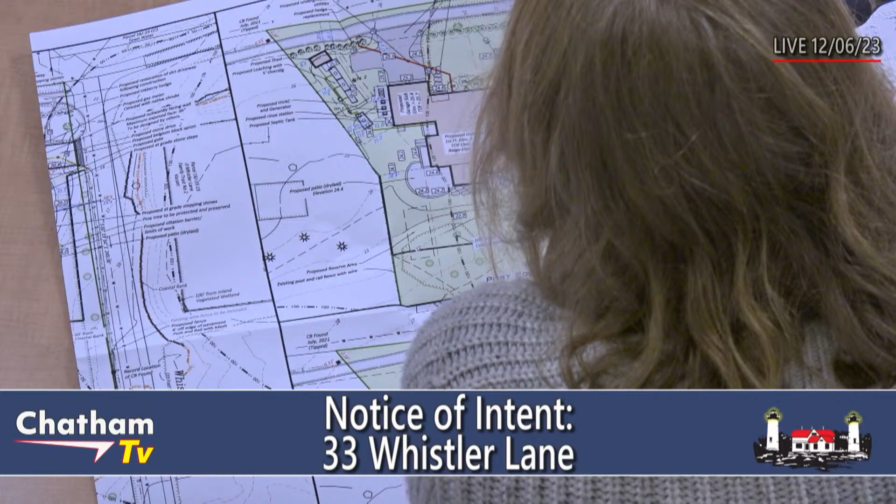Though grandkids will probably have fun rolling down it. Will it be planted with grass? Currently, that's the plan, to plant a grass mix on it. They are working on a landscaping plan and would like to come back in later to work with the agent on the final landscaping plan.

Do you think that would happen before the end of January? I can certainly ask. It'd be great to have that in at that point, so we could get Paul's input, and then approve everything at one time. Oh sure, okay.

Okay, on the mitigation area, way down at the end of the property, I can't quite follow where fences will be after you're done. Will fences be on the inside of the mitigation area, on the outside, or just one or the other? No, the fence would be set, and then the mitigation would be outside of the fence, contiguous with the Wilkinson ecological restoration that occurred on the adjacent property.

So we're not separating mitigation from other mitigation areas or other native areas. So will there be a fence around the whole property in addition to your proposed dog fence? No, that would be the fence.

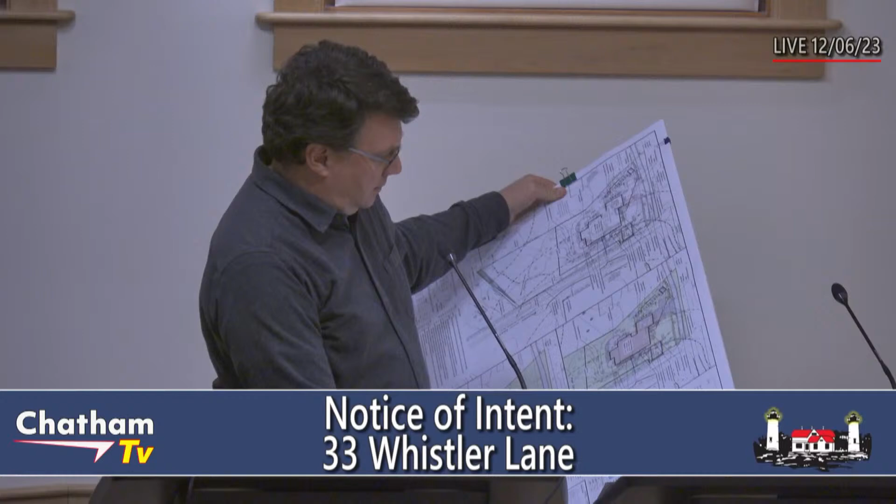Okay, so the green line, what does that represent? The property line? Property line, okay. Even though it says in the green area, existing post and rail fence with wire. Yes, because along the westerly property line there is an existing fence.

That would be cut back, and then a new fence would come across. There is a wire fence that exists at the edge of the lawn now, that would be removed, and a similar post and rail fence would be installed heading around. So will there be fencing all where the green line is? No, just the property line. It'll move forward, north from the green line, and to the south we'll have mitigation. But otherwise, it's the property. But no fencing otherwise? Right, other than that fence.

Why do you need that fence if it's not connected to any other fence? It would be, that's why I'm confused. Okay, so we have an existing fence, is that the property's fence or the contiguous one, who put that fence in? I believe the Goheens put that fence in. I was just wondering where that went.

So we have existing fence along the westerly line, it goes down to the property corner. We would pull it back one section, and then attach a fence that runs out to Whistler and then back all the way up. And the dog fence would connect to it. That's the dog fence. It is the dog fence.

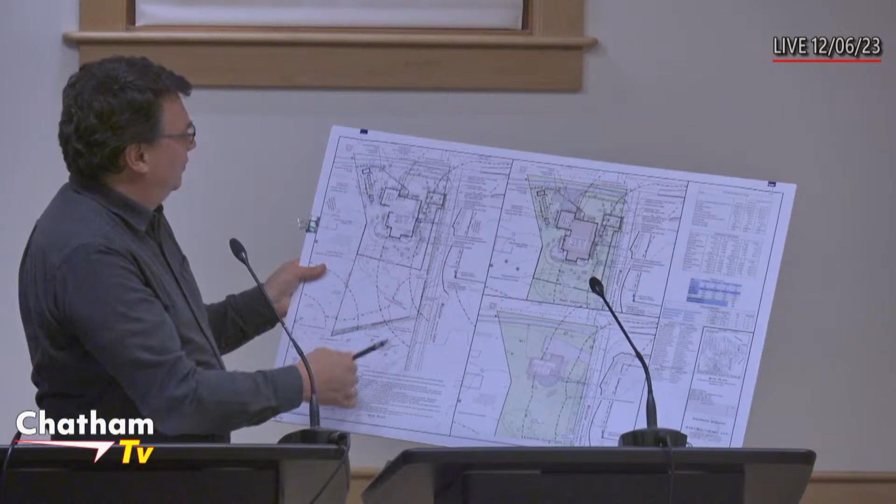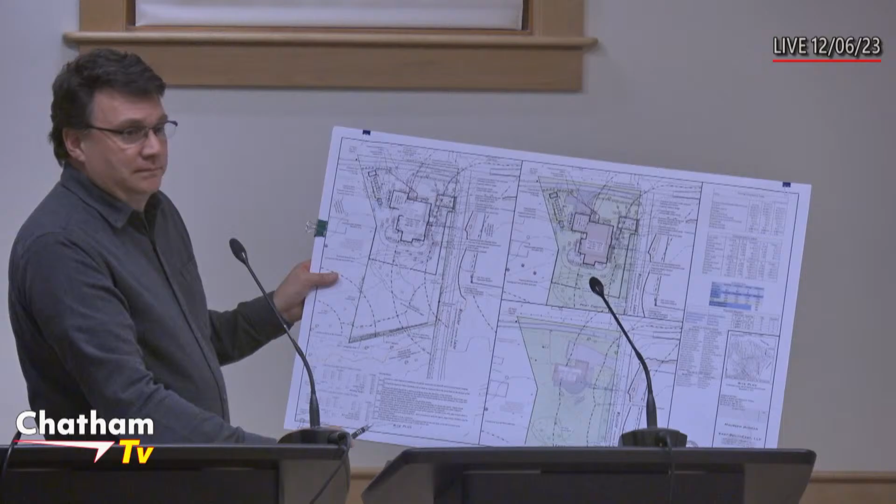And you say the foundation plants will be native, drawing from the list included in your plan? Yes, we added a few in there just to get things started. We put inkberry in for a hedgerow to the north, that may change out to a winterberry. There's some pasture roses that I put up against the house. It's still up in the air at this point, so I've given them the native plant list and they're looking through it. Oh, so that's not firm yet? No, but they'll get us something before we have to rule. But I have expressed that it's going to be predominantly, if not entirely, native plant species.

Yeah, I want to ask you a general question. I think I've asked you this before, but I want to ask it again, and that is, typically with your projects, very often you don't work with a landscape plant person. Who does your planting, and what is the plan of care for the mitigation plants?

We did pull together a set of notes after the last time you mentioned this. I don't have them on this plan because it's not really a landscape plan, but we generally work with the property owner and provide a list of what's acceptable. Sometimes we say this will work here and that will work there, and we just stick to the native list.

We often put in orders of condition if we don't know who the critical key contractors are ahead of time. That selection has to be approved either by the agent, or the agent can refer it to us. Sometimes we don't know ahead of time, so we put that in if we don't know.

On the mitigation to the south on this one, I cheated and copied the list from the land management plan that occurred to the south, because that's got to be compatible. I picked and chose so that it was the lower plant, so that it meets the view easement, so they're not in violation.

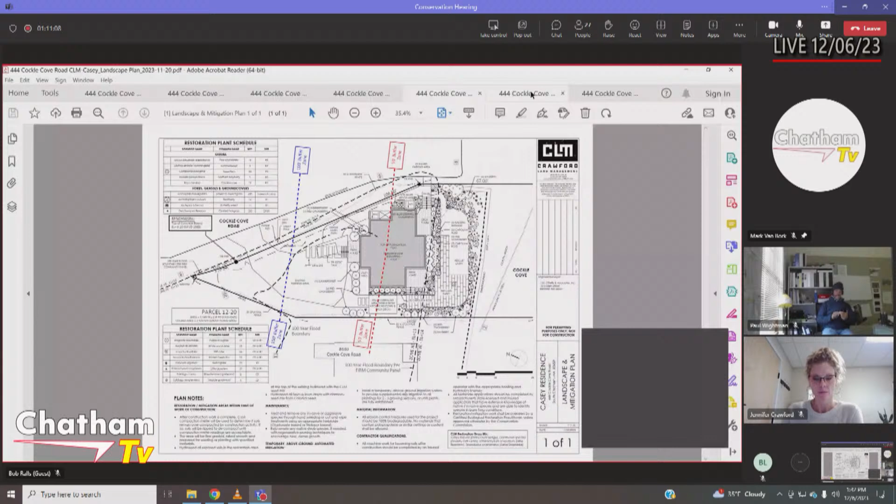So we're proposing to demolish the house and deck and reconstruct a new single-family home, 3 bedrooms, on a flood-compliant foundation. We've pulled all structure out of the velocity zone, showing about 460 square feet reduction in the 50-foot area, and an overall site reduction of hardscape and building of about 200 square feet.

The site is improved with a shell driveway, which will remain as currently constituted with some introduction of pavers. There's a small bit of lawn at the end of the driveway along Cockle Cove Road, intended to remain and be converted. We're proposing an outdoor play area - if you've been to the site, there's a play structure in front of the house, so we'd create a bark mulched area around it, placed on the west side of the house for visibility from the house and rear deck. There's also a proposed dry-laid patio for outdoor grilling and vista.

The remaining area is going to be planted, and at this point I'd be happy to turn the meeting over to Jen, who will talk about her restoration plans, and then answer any questions the commission has.

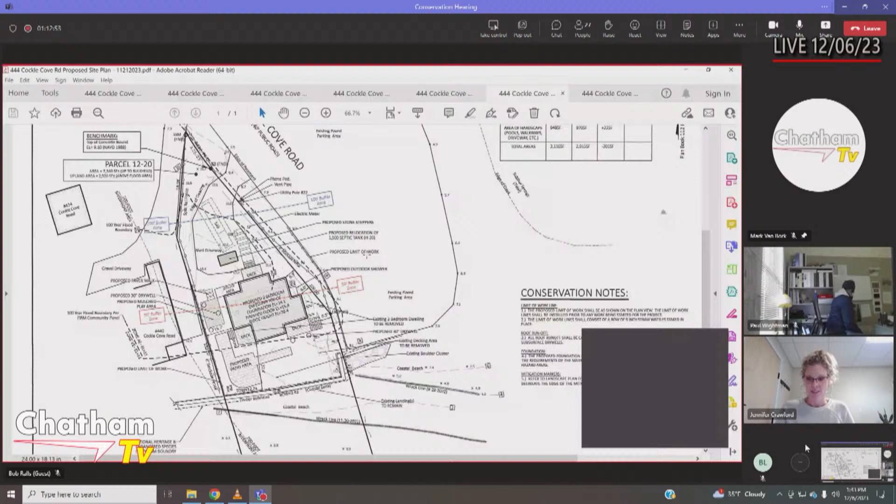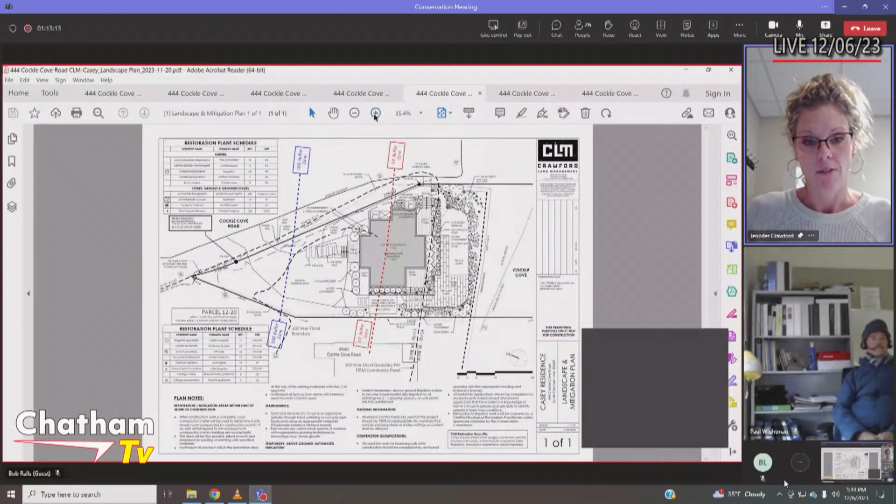The project is pretty simple, John has already hit all the highlights. With our restoration plan, since we have a net reduction of coverage throughout the buffer zone area, we've proposed plantings around the house and along the top of the bulkhead. If you visited the site, you know that area is currently just open sand or has the existing house and deck right up to the end of the bulkhead, so anything we're doing with this plan is an improvement over the existing condition. We've chosen as hardy of species as we thought we could, since this is an extremely exposed location getting buffeted by wind, salt spray, and other conditions these plants will be contending with. Our species list isn't extensive in diversity, but we have limited availability for working in these site conditions. We've included a fescue lawn panel to accompany the dry-laid patio area, so there's some outdoor space that can be utilized on the property, as the house and deck components have shifted so far back from where they currently exist. That pretty much covers it.

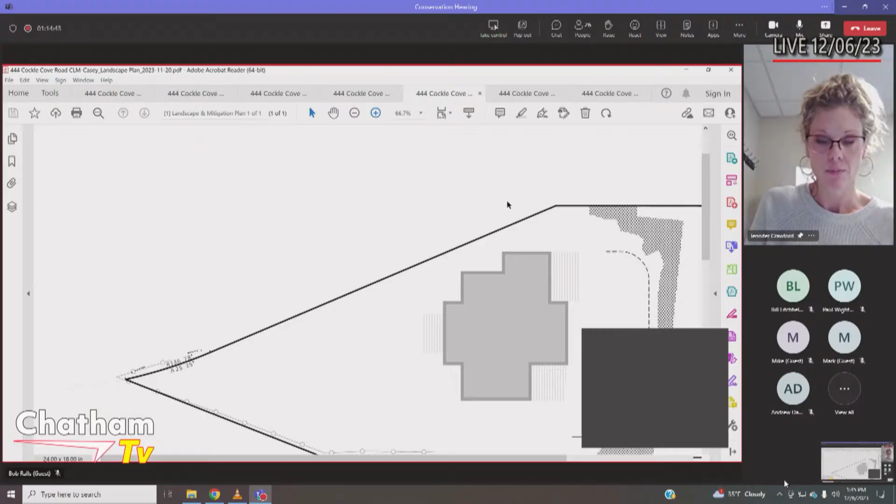John, I want to go back to something you said. You mentioned that the remaining lawn along Cockle Cove Road will be retained and converted. Right now it's regular grass, but Crawford Land Management identifies that area as becoming fescue lawn. So the existing lawn along the roadway will be changed to fescue? According to Jen's plan, yes. My point was that the driveway is basically staying as you see it today. That's why I wondered if I misheard you say converted, since I thought it was just staying.

Okay, thank you. Can you explain the patio proposed for the front of the house, facing the seaward side, which is fairly large and an unusual configuration, and is in a VE zone?

That area currently is open sand. That side of the house has the kitchen and dining room, versus the parking lot side where the primary bedroom is. Since the active part of the house is on the south side, and we can't extend a deck or have structure within the VE zone, it made sense to utilize that area.

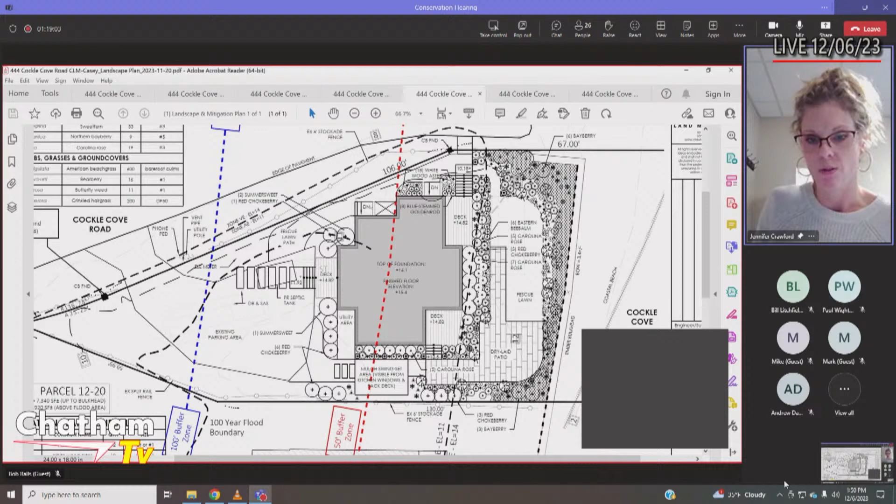Why does it have that long extension, the long piece? We wanted to accommodate the current patio furniture the property owners use on the very large deck on top of the bulkhead, since that's how they've historically used those outdoor spaces. I included that long strip so they could place seating along it to sit and enjoy the view, since it's also very windy on this site, versus other furniture better suited for gathering on that corner.

Would it be helpful to show some of that on a plan so you could see how large or small the spaces are? That would be helpful, because I'm struggling with scale here—since dimensions aren't indicated, in my mind it keeps growing and shrinking. Yes, adding anything that can provide scale would help.

But this area is separated from the house by the restoration plantings in between, right? So it's just accessed from a set of stairs off the deck? Yes, that's correct. And that planting bed is only about 3 to 4 feet wide between the deck and the dry-laid patio, so it's small—not like a large 10-foot wide planting area.

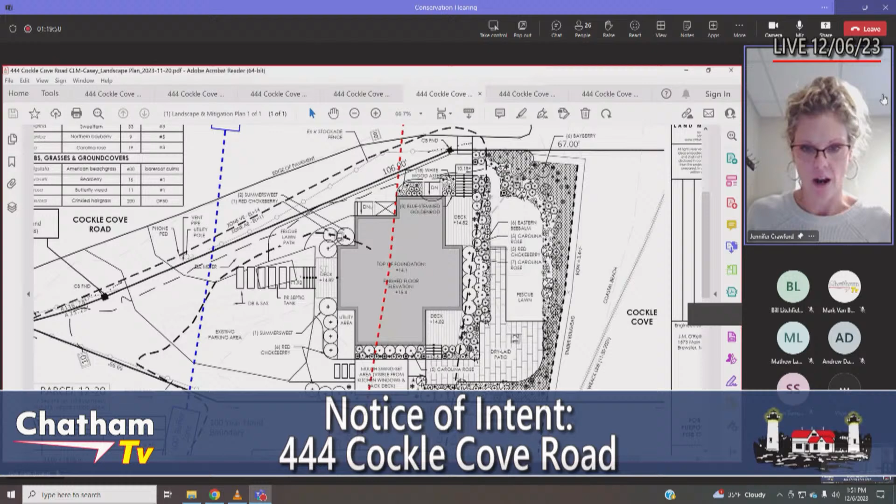These are very small spaces in actuality that we're working with, but we're happy to add dimensions and show some furniture to help bring it into scale. We can also show it alongside the current large deck that spans all the way to the top of the timber bulkhead. It might be helpful to see that size comparison.

So Jen, is your idea that putting in this patio, they'd have more of a tendency to protect the grass that's further to the right of it? The fescue lawn would be protected because they're less likely to put lawn furniture on it, because now they have a patio to put the lawn furniture on. So is that part of your reasoning, that this protects some of the grass so they're not moving furniture onto it? Yeah, absolutely.

And also you have to remember that it being in the velocity zone, we can't propose a deck or even an elevated 6-inch deck that sits above. We're really constrained, so we're trying to maneuver through these regulatory areas as gently as feasible, so to speak.

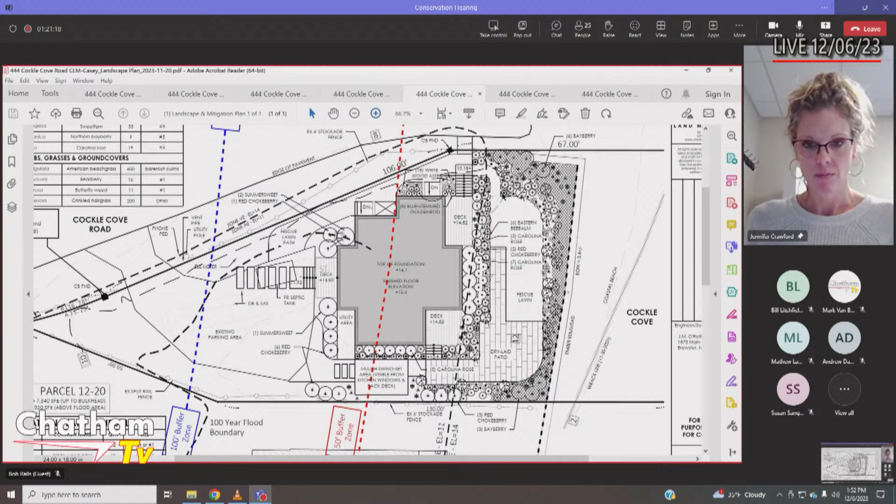Thank you, if I could just chime in through the chair. The existing deck that sits seaward of the house is 22 feet deep from house to bulkhead, and about 25 feet on average east to west. So the deck is massive compared to what we're currently proposing. The western deck that has the set of stairs onto the patio is 9 by 10, and the eastern deck that serves as access from the yard up the stairs is 6 by 14.

So the patio was asked for by the applicant simply to be able to enjoy the outside. Because really, those decks—Jen's right—you could have enough room for a table and 4 or 5 chairs, but they also serve as access into and out of the house. So putting a grill plus a table, we just needed some additional space.

And Jen came up with a great idea of a dry-laid patio. Honestly, we could leave it as just the sand that's there now, but we felt that also wasn't a good option. We feel that being able to have a space where they can put their patio furniture, and kind of stay sheltered behind the neighbor's fence when it's windy, and provide a space they can actually use on the water side of their house, was fair and reasonable considering the moves we've made to move everything further back and out of velocity zones and reduce that NDZ zone.

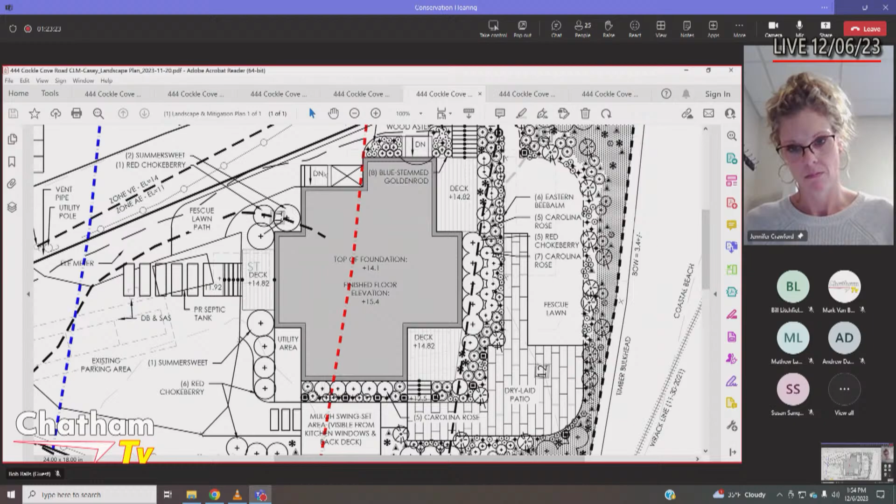I do have one question—I can't remember what it was, I wrote it down. Outside shower. It's not within the 50 feet, so it's definitely in the 50 to 100 zone.

Can that be called a rinsing station? Yeah, it's a rinse station. On the plan it says outdoor shower. I just read it. No, it's a rinse station. That's what I assumed you meant. I thought you would agree with us.

I could blame the drafts person, but that would be me. Well, then go ahead and blame them, yeah.

Okay, Karen? I'm a bit concerned about putting the swing set and mulch primarily within the 50 in the NDZ. I know the swing set has very little impact on the ground, but the mulch does have an impact. And I'm wondering why you placed it there and why mulch.

I can respond to that. This property owner has children that are special needs children, so having a swing set is something they very much enjoy. Being able to locate that in an area directly outside the kitchen window, as well as outside the dining room and connected to the outdoor living area, was extremely important to this property owner, so they can keep an eye on their kids and have that area function within the greater landscape.

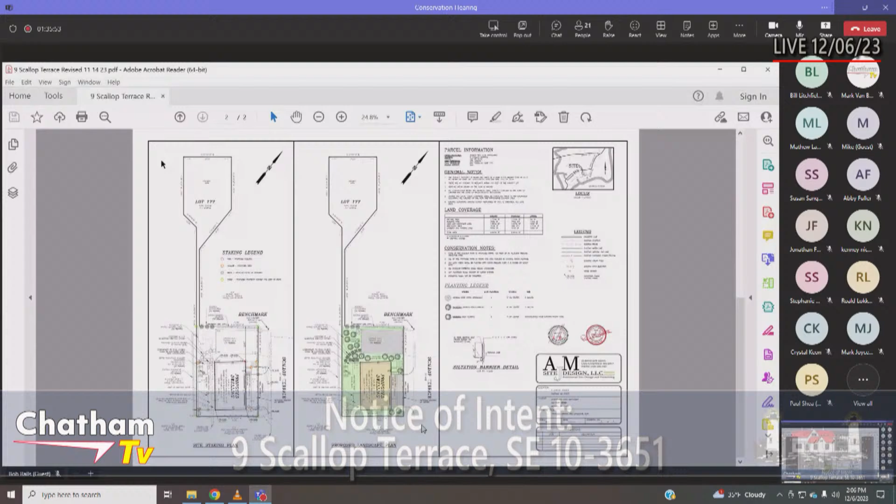As part of that, we're also relocating the 5 inkberries that were located in the front of the house, per your request. We will use those to do a little screening around the rinsing station, also per your request.

There was some discussion last time regarding the apron. We had originally proposed a concrete apron leading up into the drive-under garage, then discussed possibly a dry-laid cobble apron, but we're actually going to remove the apron altogether. We're going to run shell right from the garage to the edge of pavement in the front.

Also, in that thread, we went in front of the planning board last week for a zoning board referral for a second driveway in the Conservancy District. Generally speaking, they don't allow that second driveway, but under these circumstances, where the parking down here is generally not good, and given that we're removing the patio from the front yard, basically, and that's where the driveway is going to go, they found it acceptable to endorse this project to move to the zoning board filing.

So the zoning board hearing is coming up on the 21st. With that, I'd be happy to answer any questions you may have.

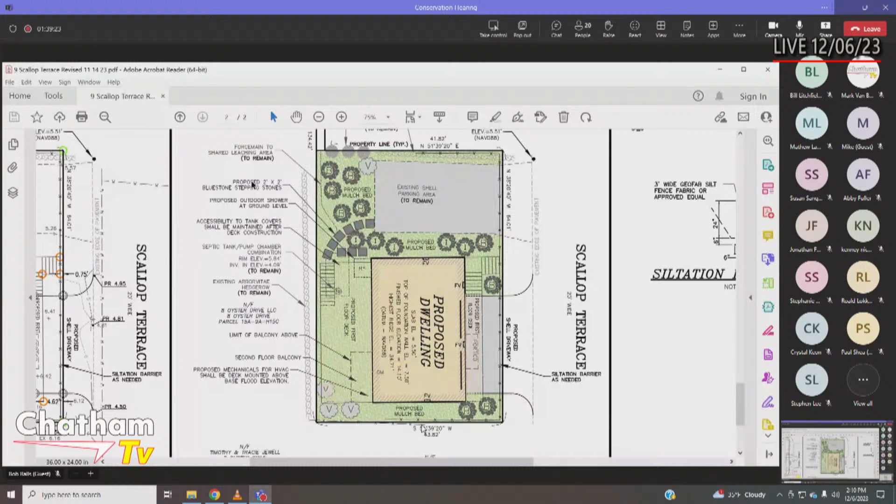Well, all things being equal, if you've got a spot for plants, that's where I would go for. We could absolutely put some more, just some native ground cover with little or no maintenance. In fact, I would argue there's less maintenance than mulch, which you'll have to replenish. True. That's it.

Elise? Thank you for handling the mulch. I'm pleased to see the shell, thank you for removing the concrete. I think the shell is a brilliant choice, so thank you for that. And I don't have any other issues.

All set. Good. Karen? Well, you need to update your wording on your plans to say rinse station, not outdoor shower. I call it an outdoor shower and then I write RS, so yeah.

Well, like John, I've got to fire my drafter. You too, huh? Time to talk to John.

Okay, anything else? Mary, anything? Yeah, nothing else. All right, let me see if I've got anything that wasn't covered. No, I think we are set.

All right, so we will, since you're going on the 21st, provide our usual letter with qualified approval and schedule this for an order of conditions on January the 3rd.

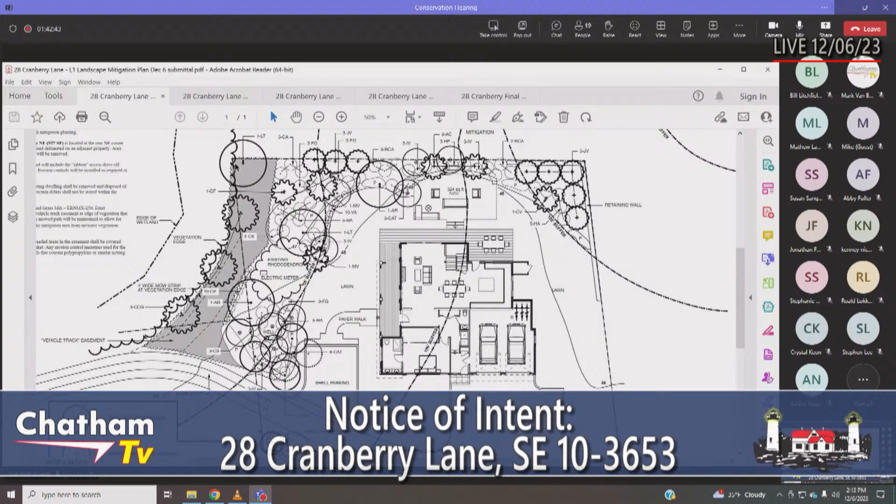So after the last meeting, the design group took a look at the project again along with the owners and made some changes pursuant to the comments that we got last time. So the significant change is removal of the circular driveway, and the landscape plan now shows that area will be restored to the extent possible, since the old vehicle tracks are there. No significant plantings will be placed in that area, but it will be vegetated.

That eliminated any new coverage and resulted in the total removal of existing coverage within the no disturb zone. So on this property, the no disturb zone will be restored in its entirety, and along with the removal of the vehicle tracks off property, that results in over 700 square feet of site coverage being removed as part of this project.

In return, we're asking for a 1,270 square foot increase in the outer area. So basically, we're getting rid of all the site coverage in the no disturb zone and asking for an increase in the 50 to 100. Although that results in a 45.5% site coverage, if you take into account the over 700 square feet that's being removed in the no disturb zone, we're actually under the 35%. It's just that the numbers are getting shifted from one resource area to the other, and the rigid way we do the calculations doesn't reflect that.

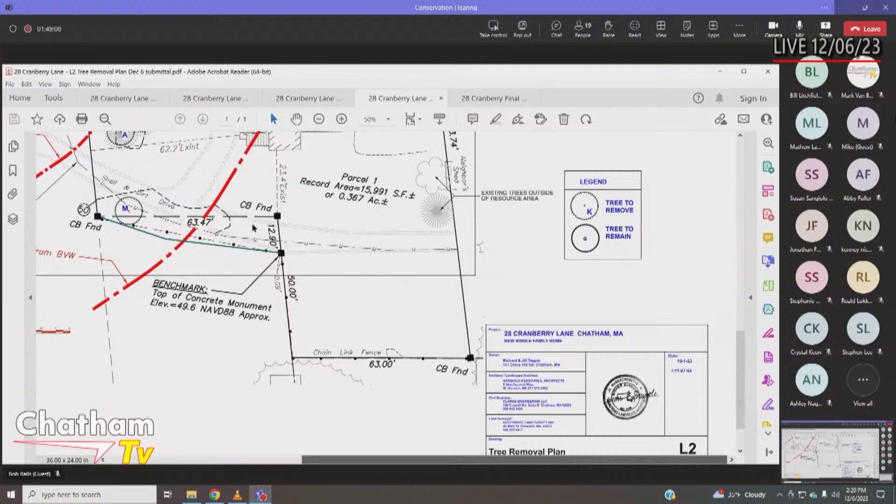I think, Susan, the issue is if you look below where you list A, B, H, M, and it says there will be 4 pitch pine trees removed, underneath that statement it says 3 trees less than 15 inches, 2 trees greater than 15-inch diameter. That's not matching.

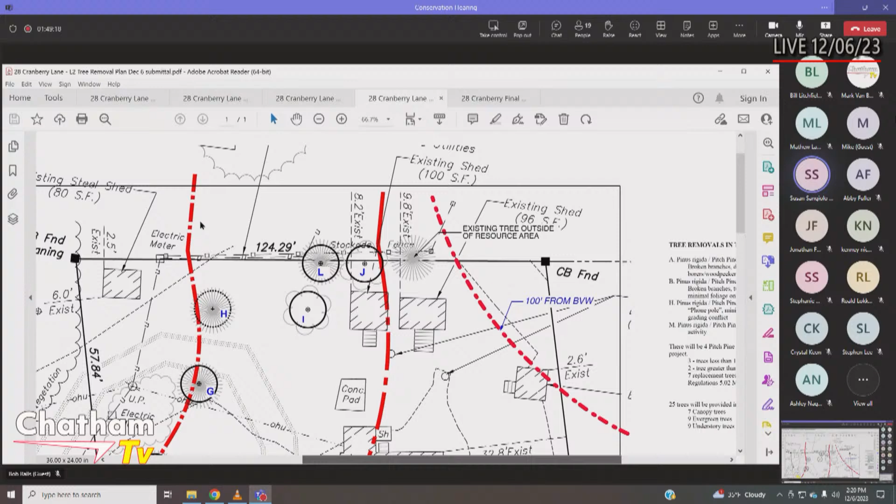Well, no, it doesn't match. That's a mistake on my part. I believe that's leftover, but it will be 4 trees removed. Okay, but you need to fix that. Yeah, I need to fix that, yes.

We started out with 13 and backed off to 4. Right, and the thinking there was that the other trees do have some turpentine beetle damage, but not nearly what the 4 we'll be removing have.

So we will try to do some sort of treatment program with bifenthrin, but again, it's a sprayed application that you do twice a year, so we need to be careful about timing for that actual application. It only needs to be sprayed in the bottom, say 8 feet of the trunk of the tree, where the beetles are most active. So we're gonna do what we can to try and hang on to the other trees that will remain, and that's with a spraying program.

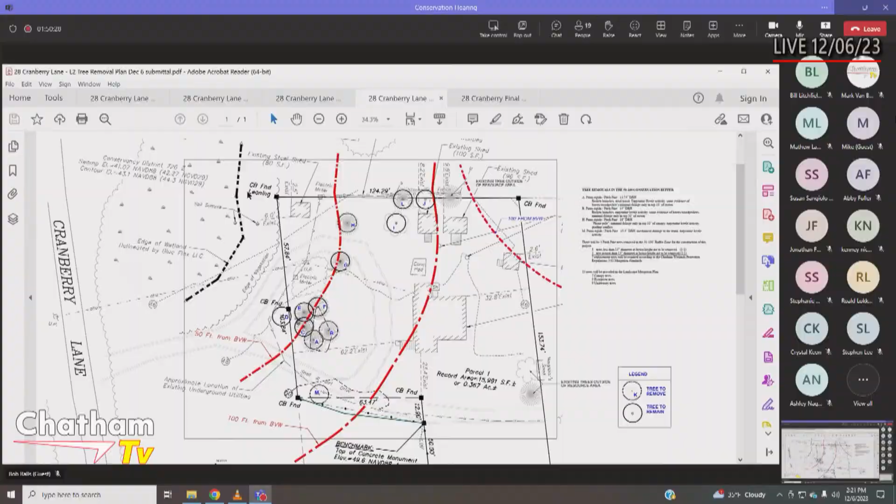I think that's great. I think the clarification is that you're still correct that there's 7 replacement trees required under regs because it is 3 trees larger than 15 that are greater, and 1 that is less. So the math is still correct, it's just a typo.

Sorry for being nitpicky, no, it's going to be a document of record, so if there's any confusion that it would create, we want to eliminate that. Thank you for being eagle-eyed, I couldn't read that. Okay, but other than that, thank you.

I am pleased with this. The only question I have is that area that's in the 50-foot buffer landscape mitigation area 1 — is any of that area part of the easement that we've heard about? And if so, how does that work, that you're planting in the easement?

Can we go back to L1 now? Yes. The square footage shown there, the 1,620 square feet, that's only within the property, so the calculations are all based on things within our property. Outside of the property, basically there's lawn area and the existing driveway.

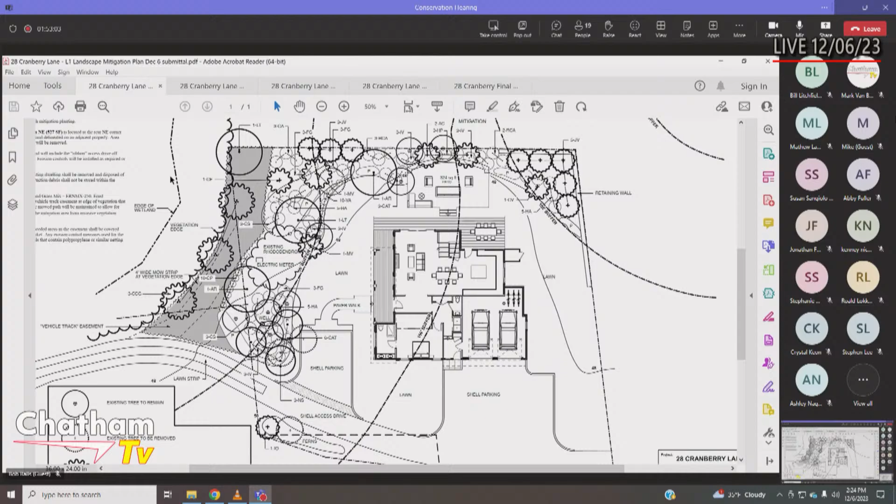No, I was asking because it's an easement, and I haven't seen plantings go into an easement, so it's for my education that I'm asking — does anything special need to be done to be allowed to do this?

At this point, it's presumed that the easement is inactive, in that there's a stockade fence on the north end of the driveway.

So the easement description simply says in the deed that there's a right to pass and repass. The only definition of where the easement is, is shown on the land court plan. There's no metes and bounds description, it just shows a traveled way, and you'd have to scale the 1 in 60 plan to determine the width. So it comes down to where the vehicle tracks are on the ground today, and I don't believe they've changed substantially.

So the idea is to not plant anything substantial in that area, just create a ground cover. But if somebody wants to reestablish it in the future, and they have a right to do so, they would have to come before the commission.

Okay, thank you, I just wasn't sure how that's allowed or dealt with. And the easement goes back 80-plus years at this point. But if someone were to resurface it, you're saying you've left enough space for them to be able to... the idea is not to block it by planting trees within it.

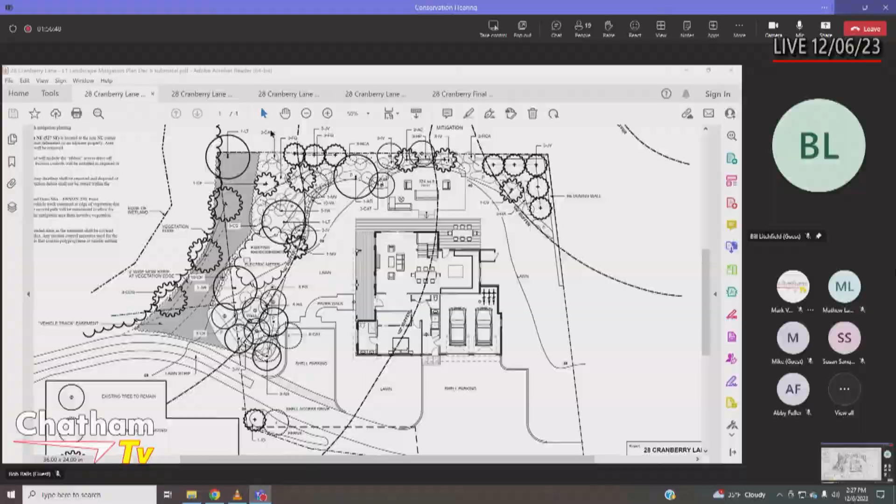Why don't we pick one of those? And if you don't have what you need at that point, we'll do a quick review to make sure we're set with everything we need for the order, just to remind ourselves, because there's not a chance we'll remember all of this by February. The 14th is fine with me. Okay, the 14th works for us too.

I know there was an abutter last time with a lot of comments, but I don't remember their name, and I don't see anybody. Is there anybody else on the platform or on the phone who wishes to ask a question or make a comment?

All right, let's have a motion to continue this to the 14th of February - not for an order, just for a check-in to see how things are. I move that we continue 28 Cranberry Lane to the meeting on February 14th, 2024.

Gordon, second. Roll call vote: Bob, aye. Elise, aye. Cheryl, aye. Karen, aye. Mary, aye. I vote aye. We'll see you all back here on the 14th of February. Thank you all very much.

Appreciate your willingness to listen and adapt.

The next notice of intent is 162 Shore Road, Tom and Michelle Jennings, map 16D, parcel 15-29, SE 10-3650. Removal of an existing dwelling and construction of a new dwelling located outside the outer area, relocation of an existing accessory building, construction of an in-ground swimming pool and hardscaping, abandonment of an existing septic system and installation of a new IA septic system, and restoration of existing lawn with native plant species.

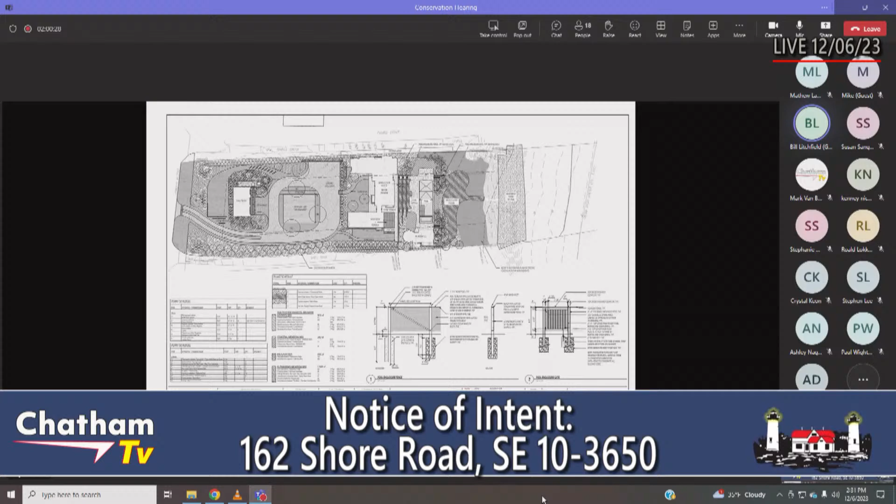Yeah, we are waiting for ZBA and also Historical Commission. It would probably be February at the earliest by the time we would be in front of them. It might even be later than that. So there's no urgency in this regard. Okay.

Good to know. Let me open it up to questions or comments on any changes made. I know we wanted to ask about the license agreement with the abutter on the north side for the mitigation area there. Has that been finalized?

If I could respond, Madam Chairman, Bill Litchfield. I assume the document you just accepted for the Scattery property can be the model for us. In our last conversation we were waiting for that. Mr. Riley was kind enough to send me a draft of that document, and we said we would tailor our version to what was acceptable. I understand you've approved the form of it, so we will do that with the property owner to the north.

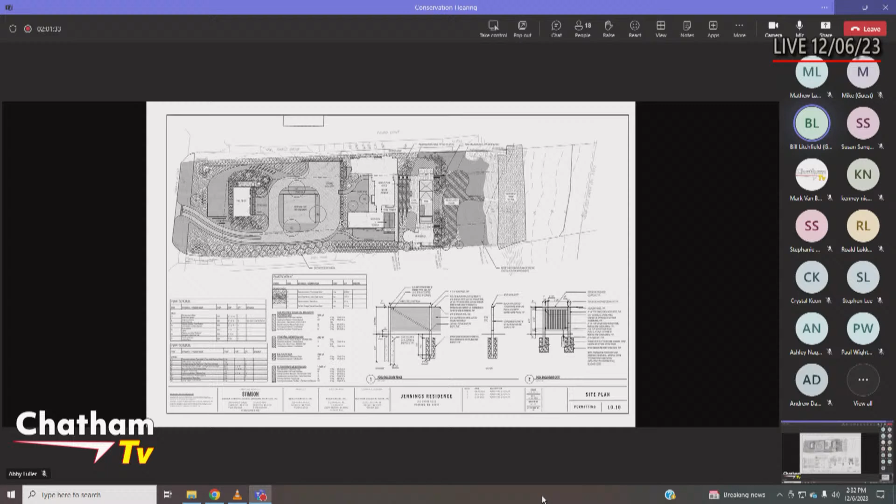Okay, so we have approved the form, and we will make it a condition of the order, unless you get it before we get to the order stage. I would expect we can do that. Yes. Okay, so we just need the signed copy for the file.

Questions or comments from commission members on any of these changes? Nobody? I don't have anything. Nope. Yeah, I want to thank you for pulling the fence back. That was my only outstanding concern, and much appreciated.

Anything else? Nope, I think we're on a lucky streak today, thanking people for listening, and everybody has been accommodating of each other's concerns, moving forward toward a final plan that everybody can accept. So that's a good outcome in our book. So all we need to do at this point is to schedule this.

Similarly to the last one, maybe the best course of action is that we regroup with a check-in meeting after your zoning and historic hearings, so that we remember and have all the information needed to draft the order, and then go forward with the order in the second meeting after that. Should we do it on February 14th as well? Yeah, why not? That's fine. February 14th will be our revisiting day of all of these.

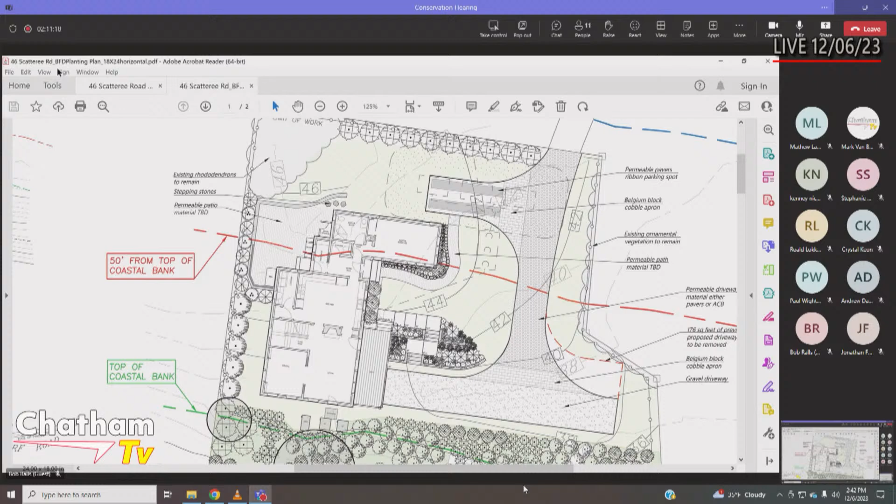One more clarification question - so on the cobble apron, that will be dry laid? Yes. Gravel is fine. Okay, questions? Comments?

I find myself once again saying thank you for listening to us. Maybe a record. I guess we should only schedule meetings after Thanksgiving - honestly, it's our Christmas present. Thanksgiving was lucky. Everybody was present, in a good mood, and said let's give them what they want.

I'm taking my cue from Dave Clark - you could do worse. All right, so what is your desire in terms of when you would like to continue? Could we continue it till the second meeting in January, and then we'll continue it again? I don't really know what the ZBA schedule is - they're going to be getting a lot of filings, I have the sense.

Yeah, the second hearing is the 10th. Could we do that? Sure, that's four or five weeks from today. At the very least, we can present you with the final plan for the driveway, cross our Ts and dot our Is, and then figure out a date - hopefully you'll know by then when you're on and we can schedule it.

Thank you very much. Okay. All right, I move that we continue 46 Scatteree Road to the meeting on January 10th, 2024. Gordon second. Roll call vote: Bob, aye. Elise, aye. Cheryl, aye. Karen, aye. Mary, aye. I vote aye. We'll see you back here on January 10th.

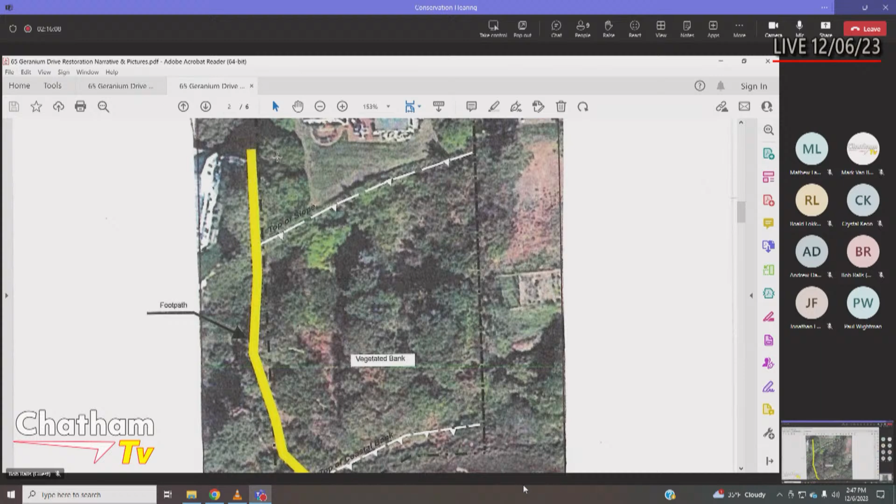Push the button, George. Just press this button right there. Is it on? Yep, you just gotta press the button. With this button? Yep, give it a go. Ah, there we go, all right, there we go.

So that area here and over here, this is knotweed and some other stuff, and maybe mostly vine, honeysuckle, some ivy, foxglove, things like that in this area. And down here is a large pitch pine that you'll see in a photograph, and these are mainly black and red oak that have sprouted after a pruning. This is mostly all grown up.

It's rarely been touched. All right, so if you go back to the photographs, just whatever photographs we have.

There we go, there's a little light. Yeah, let's start here. So that's the view now. That's the pitch pine I was talking about. And you can see in front, that's where some of the invasive vegetation is, and then it's been mostly trees topped, going down the hill. Okay, keep going, next picture.

This is like a travelogue or something. Okay, so let me get my thing going here. This stuff, that's knotweed. This is planted, I think it's miscanthus or something. Next picture.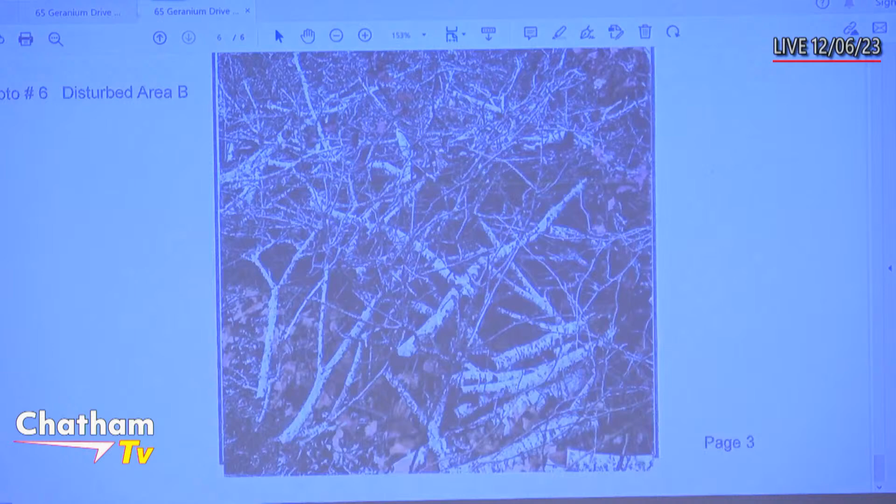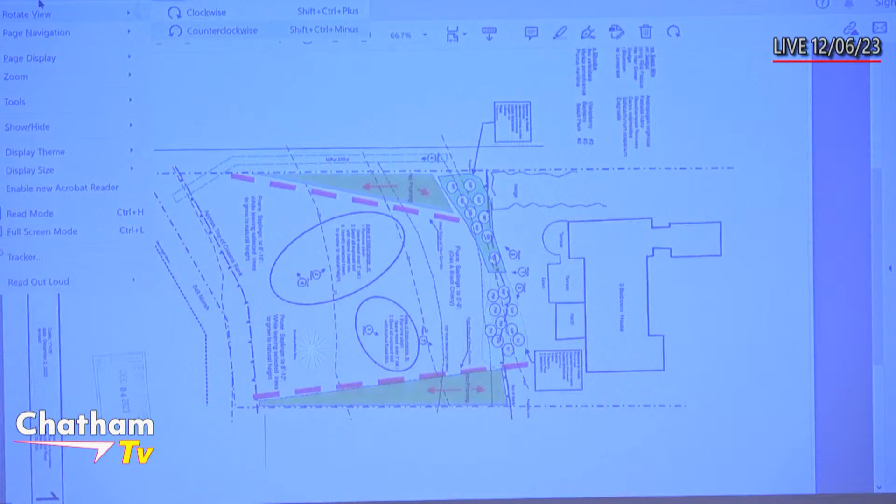Okay, let's go to the plan. Okay, maybe we can't turn it, can we turn it the other way? No? Yep, yes, hang on. Okay, you gotta rotate the view. Go back, okay, oh yep, no, up, keep going, down, one down. Someone's telling me what to do. Paul, one more, rotate left now. There we go, there you go, okay. Okay, all right, so there's the path.

This is the invasive area that was in the photo. These are the first big disturbed area. Here's where the arborvitae was. This is with the pitch pine, and this is the other disturbed area.

These areas are where oaks are growing lushly, sort of, and this is where the path is, and everything is well established. So I guess what I'm saying here is that it looks bad when they cut all this stuff, but the bank is not really eroded, there's really been no erosion, and almost everything that's been cut is resprouting.

So my feeling is that there's a lot of trees there. If they clean up the debris, the slash, not the logs, just the branches. And we can see where they've been tromping around.

The best thing then is to just reseed that with a conservation seeding that would include native grasses and some plants. And that would, whatever area that had been tromped on and was exposed soil, would then revegetate and allow everything else to grow up around it.

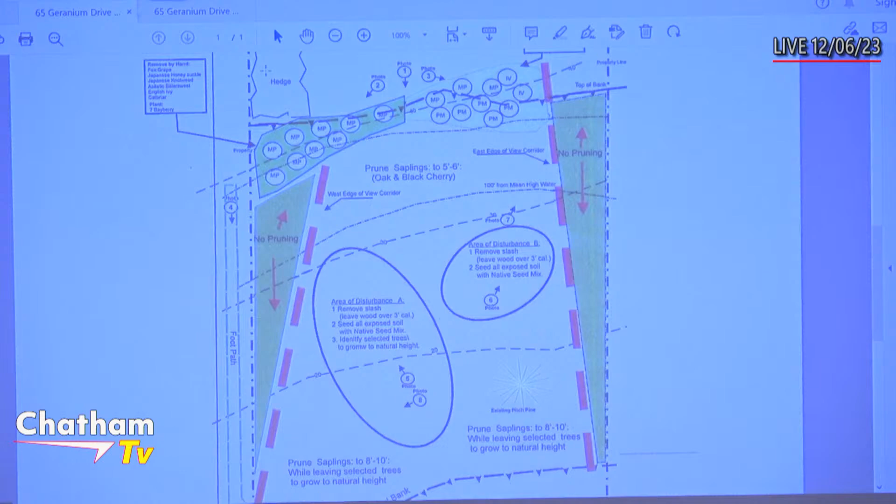So what we would ask is that this restoration plan, which will be attached to a restoration order, should not have any mention of a view corridor on it. If you can remove all of that from the narrative, I think the narrative says... the last one I sent was for a future filing. So we will hold that for the future and focus on the restoration right now. I don't want any mention of it there.

I have a question about identifying selected trees to regrow to natural height. Looking at the arborvitaes, are you talking about doing a coppicing approach, where certain leaders would be selected, basically cutting things to the base and allowing the plant to reestablish itself? You got to step back, they can't reestablish from the base growing up, so you'd have, basically in the beginning, a big shrub.

Right, and this is more like pollarding. You've seen it in pictures of European pruning of trees, where they have a tree that looks like a little ball on top, because they cut the branch. Plane trees and all, they cut the branches off the top. This is more in style with that. You'd identify what's growing well, and rather than let it grow into a bush, you'd prune for a strong leader, and that will grow into more of a tree.

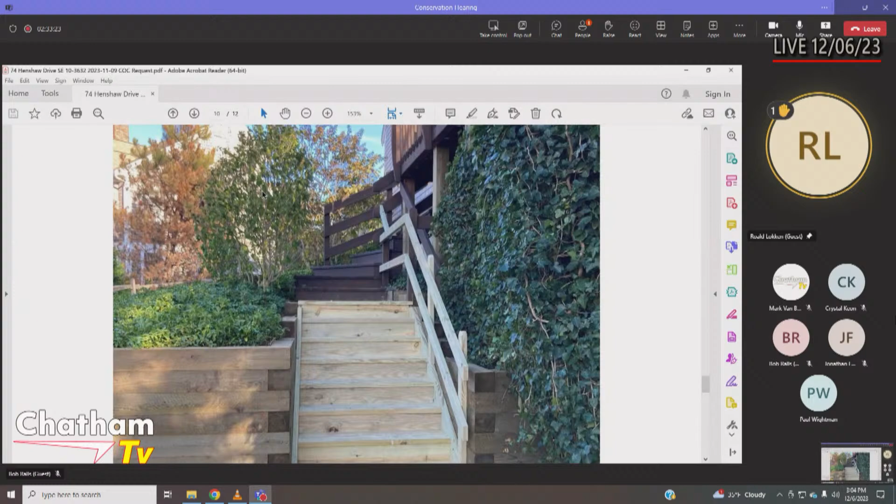All right, then we have a motion to approve the request for the certificate. I move that we approve this certificate of compliance for 74 Henshaw Drive. Gordon, second. Roll call vote: Bob, aye. Elise, aye. Cheryl, aye. Karen, aye. Mary, aye. I vote aye. That is approved.

Thank you, Mr. Lokken, for coming. Thank you for a good, fast, clean project. And for very timely filing of a certificate request, not waiting 30 years to get to it. Thank you, okay, let's move on then, Paul.

Next on the agenda is 125 Stage Harbor Road, Golden Orchard Properties, LLC, map 14D, parcel D11, DEP SE number 10-3442, construction of a building addition and swimming pool.

David's here. There's a little bit of a complication on this one. What happened is the next one down on your agenda, 3453, was this same project, but the wrong SE number was issued. So when we get down to that one, we're going to just say no work was done under that order and close it out. Gotcha. So for this one, basically the project consisted of a garage addition...

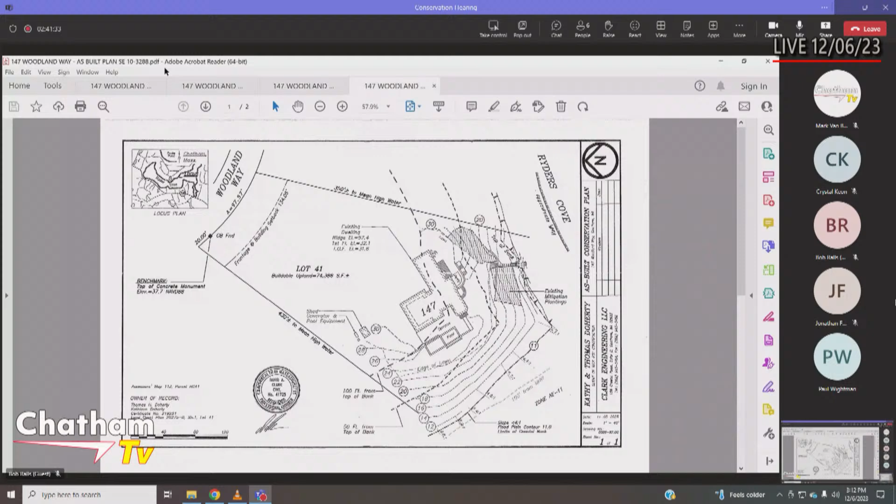Hang on, we're going to pull up the mitigation plan that shows it, it's the last one I sent you today. Is that in Dropbox? No? Oh, okay, then it'll take me a moment, hang on one second. If I were on the platform it would work, but I couldn't figure out the audio. Let me unshare here while I go look for it. Okay, it'll take a moment.

Is there any other questions or comments that anybody has about this? Paul, what was your conclusion looking at it? Well, it looked like the mitigation was on the other side. Obviously nobody likes to see that kind of a turf lawn out there, but since it wasn't caught early on, or maybe done, you know.

Actually, grass is shown on the landscape plan, go ahead David. And the order specifically says no lawn extending any further than what's on the landscape plan.

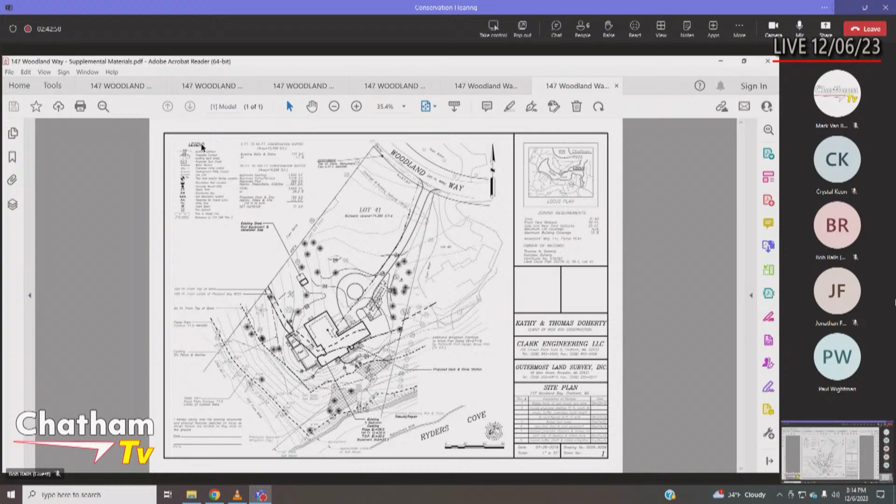So this is the site. You can see the viewpoint of that picture that was up on the screen was standing here and looking off to the right, southwest. I think it's just out of view where the mitigation is. Our as-built plan shows the mitigation planting beds.

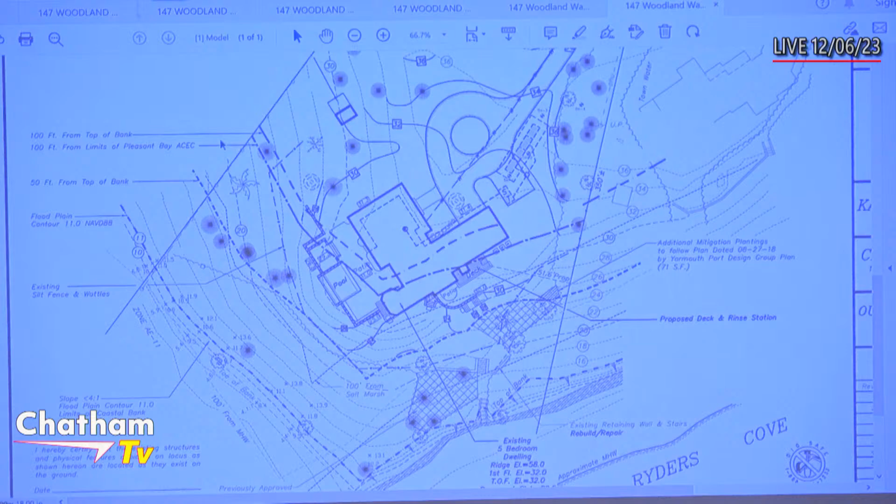This was issued in 2018, I think, a while back, after several meetings. This was a long one to get. Yeah, I remember this one, actually. This was one of my very first ones, and I was really new.

So here's the 50-foot. No, I had no idea. Okay, I see what you're saying, that it is possible that that photo was taken from that vantage point that would not have included the mitigation area.

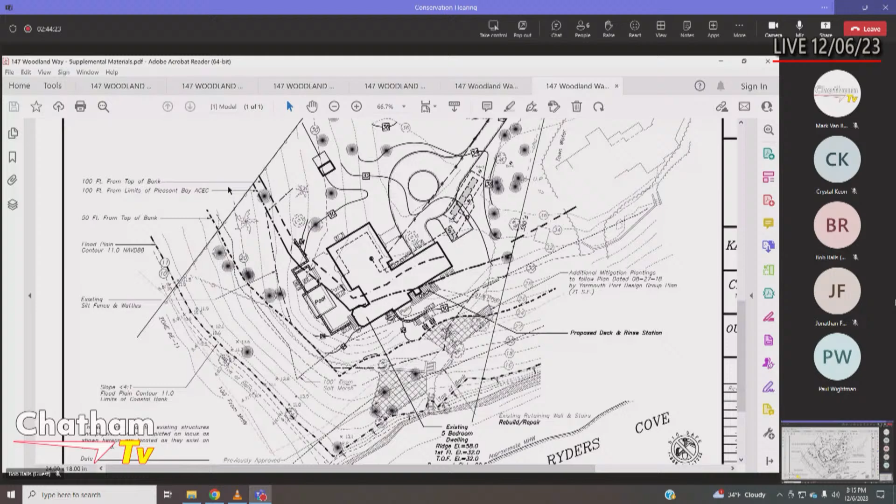I don't know offhand whether the order of conditions prohibited any kind of fertilizer or irrigation in the 50. But I think all of that, except for a very small portion of that grass area, is in the outer area.

Yeah, that is the water. So it looks like it's in the 50, just based on the area to the resource area, which means the entire area to the 100. Yeah, yeah.

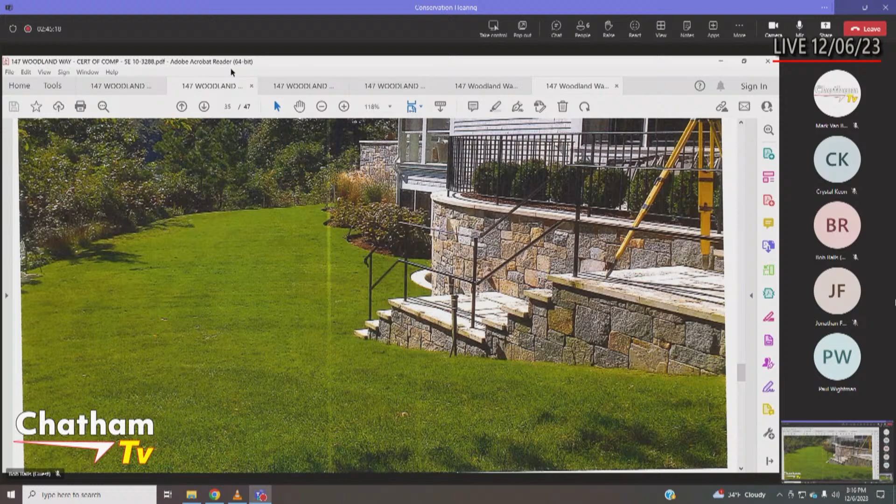I think there's sufficient ambiguity about this that we need to pursue a little more deeply, because we need to figure out whether this, how much of this, if any of it, is in the NDZ. And then we need to figure out whether this sort of lush green lawn was either addressed, prohibited, or allowed by the commission at the time.

Yeah, I think what David's saying is it wasn't - am I incorrect, David, or? It's shown as grass on the approved landscape plan. Yeah, it does say grass. That was a different commission.

Well, but this is sort of what we're trying to prevent going back to. No, I understand. If you want to hold off, that's fine.

I think, Paul, when you were just reading that prohibition on fertilizers, irrigation, pesticides, was that the order of conditions or what were you reading from? This is from, hold on, let me just go back to it. Give me a second, Janet.